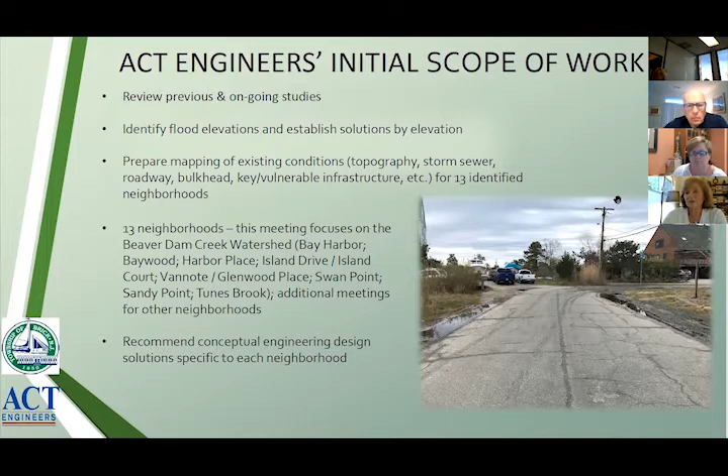So as you know, tonight's meeting we're focusing on Beaver Dam Creek Watershed. On this next slide, you will see the 13 study areas that we are focusing on, and on the right-hand side of the picture, you see the areas that are specifically identified for the study.

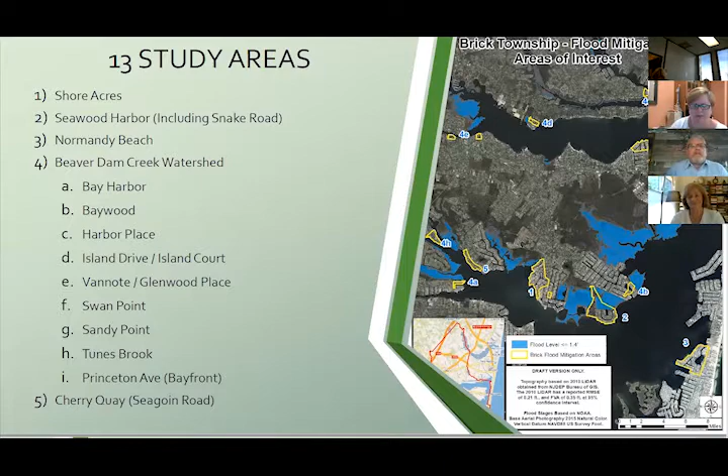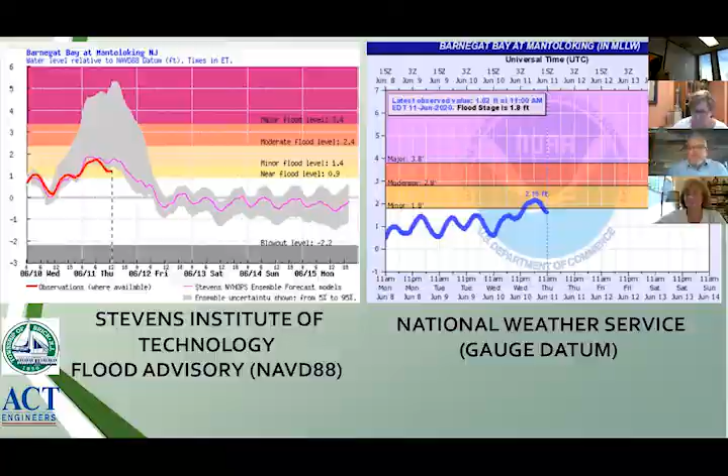So I just wanted to clarify that and mention again that all of the elevations that we're going to be talking about through the rest of the slides is going to be on the NAVD 88. Next slide.

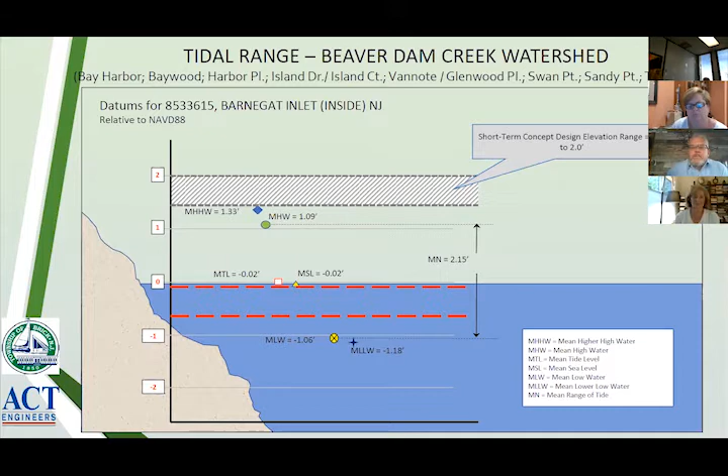Now the blue represents the fluctuations in the tide over the course of the 14 years. You can see there are several points that project above the yellow line, which I'll describe in a moment. And you can see there's an elevation and a date associated with the majority of them. The tide gauge does not record data, and they don't release data for storms such as Sandy and hurricanes because it's not reliable data, as it's beyond the range of the gauge. So those particular events are not included on here.

I just want to point out that in the center of the slide, the highest blue line, the highest tidal line, has a peak of 3.38. You'll notice most of them are well below that, and that'll come into play in a moment as to why I'm mentioning it.

Based on the yellow upper tide elevations, we came up with a concept design elevation of 1.4 to 2.0. That would be the elevation we'd look to get to with roadways, infrastructure, etc. At the 2.0 elevation, there aren't as many occurrences of flooding at these higher elevations.

You'll note there's a gap in the data between the end of 2015 and the beginning of 2017. At this point, the gauge was down and there was no data published by the agencies.

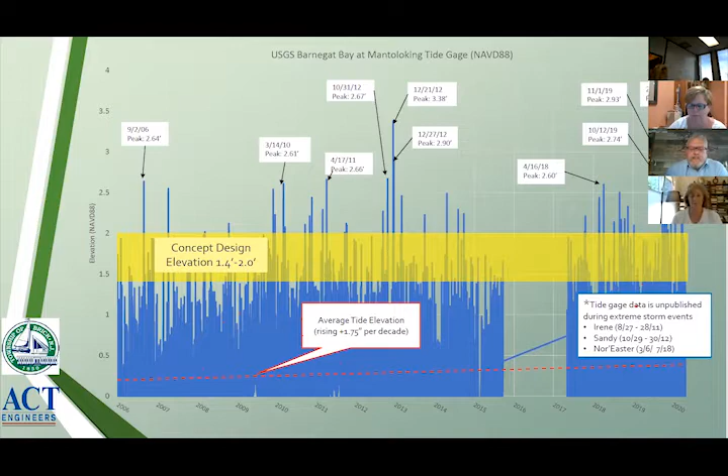This slide represents an inundation map we prepared based on the topography for the Bay Harbor area. The blue represents inundation of floodwaters, and the black is the bay waters -- it would be confusing to have that blue as well. So the blue represents water on top of marsh or land areas, to an elevation of 2.0.

If we go to the next slide, you'll notice Bay Harbor Boulevard has a portion of it in yellow. The yellow represents low-lying roadways, areas less than 2 feet, which is the flood elevation we talked about on prior slides.

This slide shows the 3.4 elevation, which from that prior slide only approached one time in the last 14 years, excluding major storm events. So this is what it would look like at 3.4, which would be more of a major flooding event.

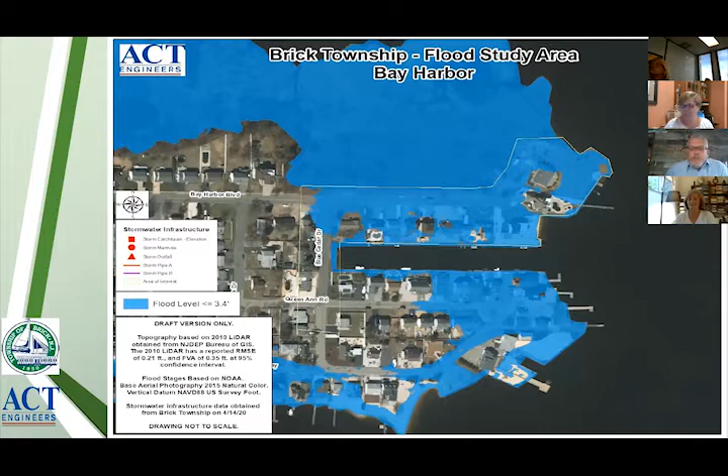Can I interrupt for a second? At our last council meeting, I don't know if you watched it, but George Scott, a resident of Queen Ann Road, got up to complain about persistent flooding down by the park -- at the end of Queen Anne. While I understand the tidal gauge doesn't reflect higher than elevation 2, if you have a south wind or an east wind, a lot of these areas just get inundated with flooding in any event because it gets trapped in the head of the bay.

Right, sure, but that's not a low-lying road. It's above elevation 2. I gave everything that was identified for the study. Can we go back? Go to the prior slide.

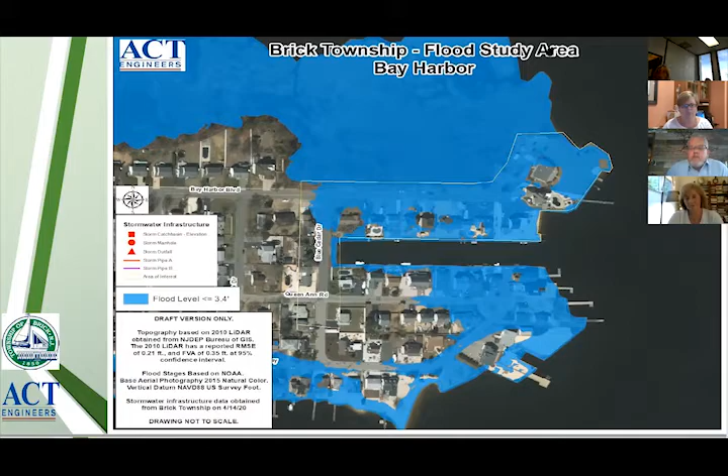If you look at the end, see how it's underwater? That should have been colored yellow as well. The end of Queen Ann Road should be yellow as well.

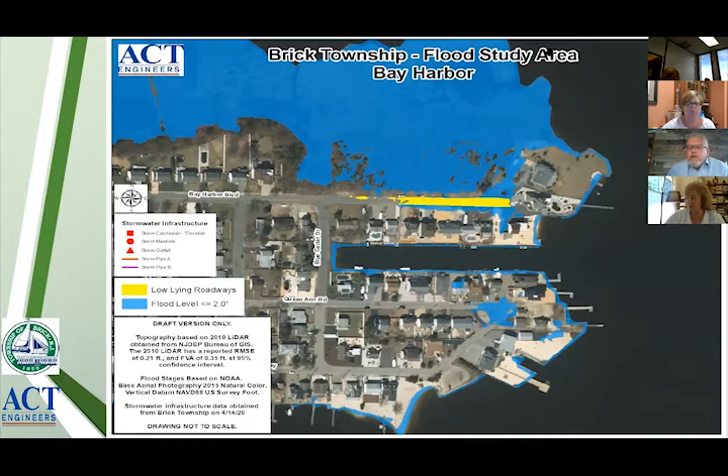Okay, go to the next one. This is the aerial, same scenario of Baywood. The orange areas on this slide indicate existing storm infrastructure, and the numbers next to the orange represent the elevation of the storm structures. At 2.0, there's flooding in a few areas, but not significant.

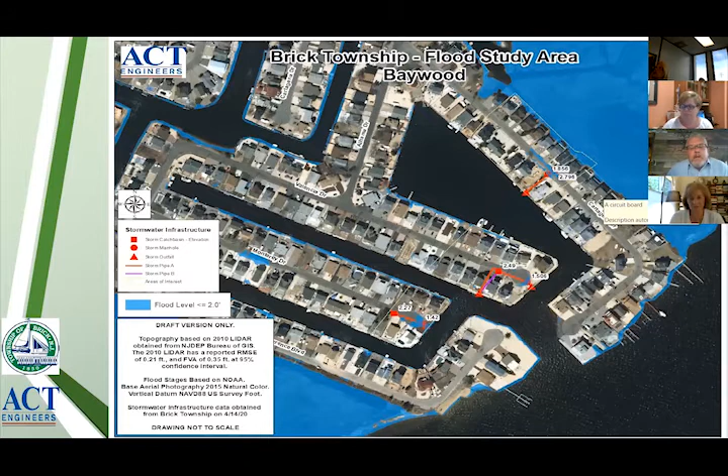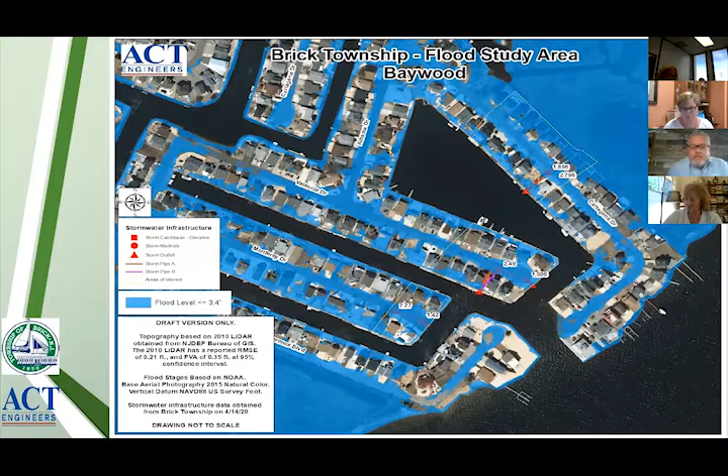Next slide will show the yellow areas that would need to be raised. These are the low-lying areas. The next slide would show the more major flooding, which would encompass more of the roadways, or almost all of them.

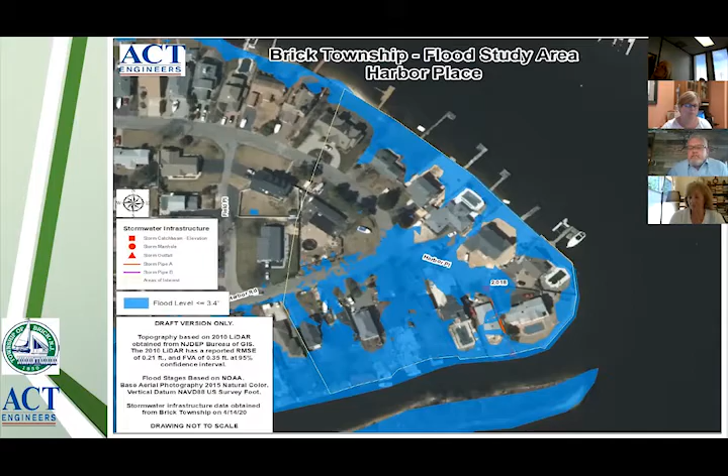And then at 3.4, all of the roadways are flooded.

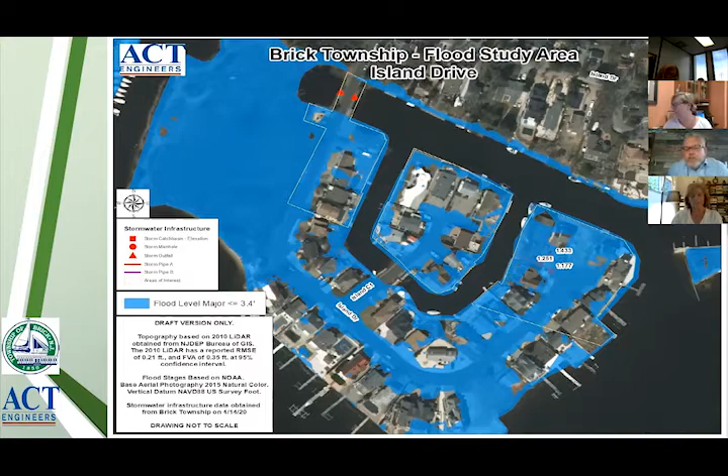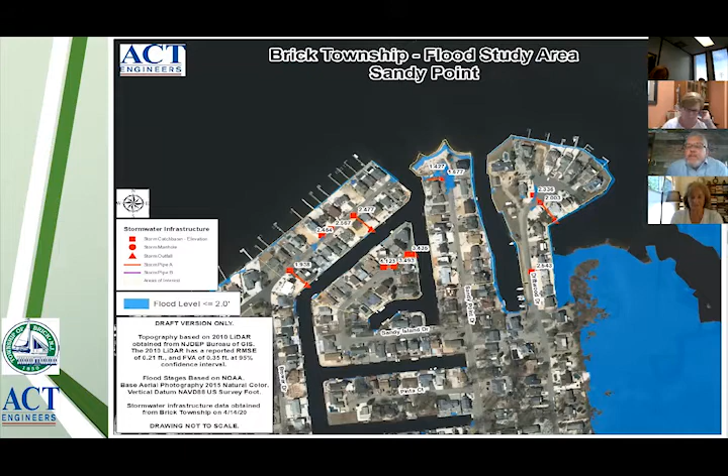Okay, next slide. This is Sandy Point. Again, you've got a little bit of flooding at the end of Sandy Point Drive. You've got some over to the left, I don't know the name of that street offhand. Go to the next slide and show you the yellow. All this flooding appears to be coming up through the inlets because it's not connected overland to any of the bulkheads.

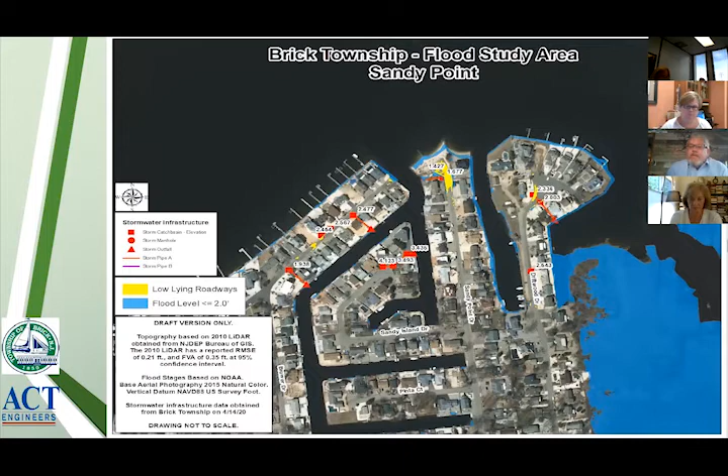The next slide. And then for an elevation of 3.4, you've got more substantial flooding of the roadways.

And this is Swan Point. There's really no drainage in Swan Point except up near the entrance road, where there's a culvert. The majority of the marsh area is flooded at an elevation of 2.

Go to the next slide, we'll show the lower part of Douglas Road and Gale Road. Is that Gale Road? Is underwater or low lying, and the end of Sheldon Avenue.

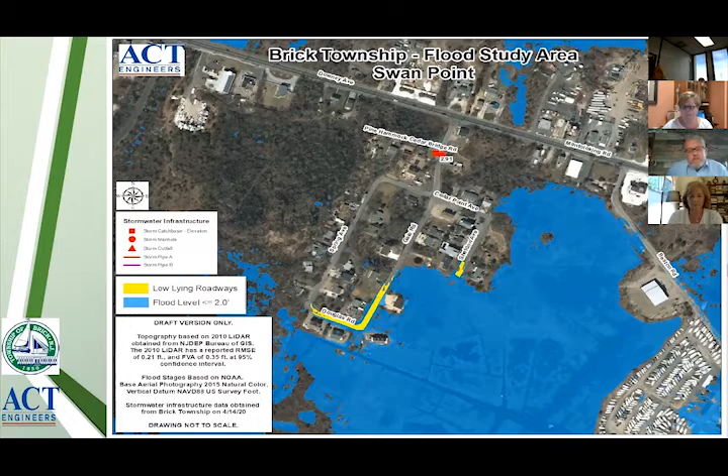And then again, the next slide will show more substantial flooding. Almost the entire neighborhood is flooded, except for a portion of Cedar Point Avenue.

This is Tunes Brook. There's quite a bit of, compared to the other neighborhoods, storm sewer in this neighborhood. There's not a lot of complete street flooding. There's a few puddles here and there around the inlets, as you can see on the edges of the road, but still wouldn't be impassable.

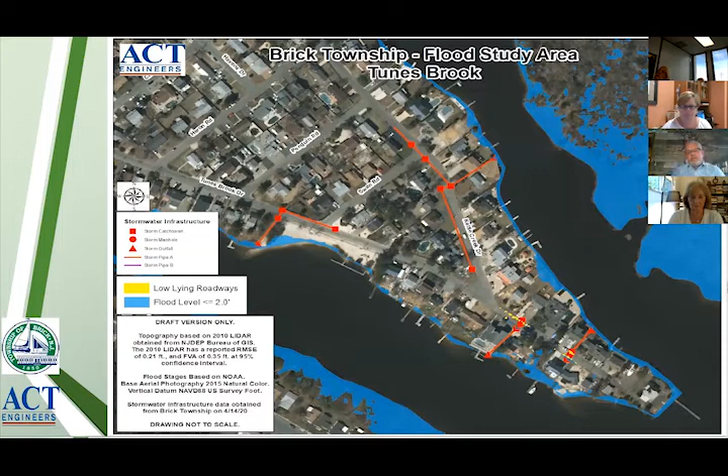Next slide. Until you get to the 3.4, which is the next slide, which then shows substantial flooding of Kettle Creek Drive and the end of Tunes Brook Drive.

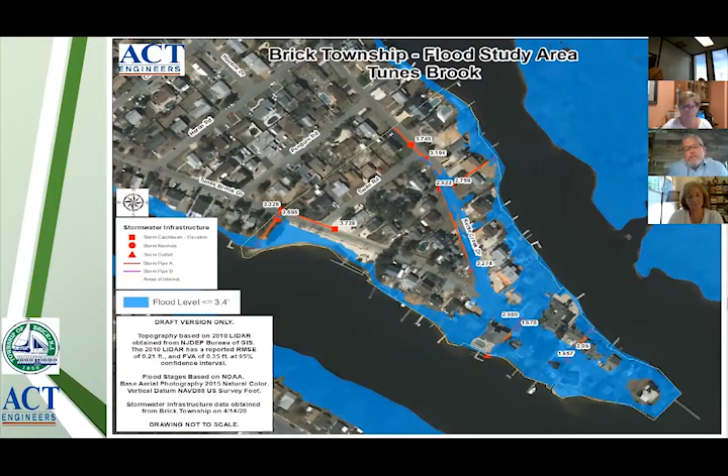That's our new flapper valve. That was our trial for the Wapro. Been successful.

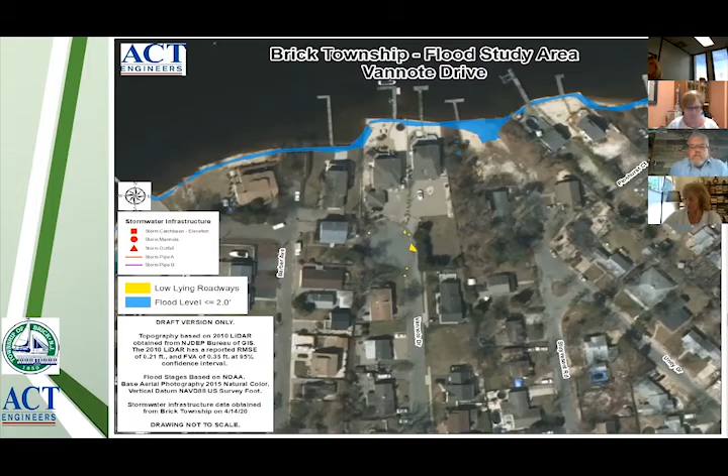So then when you have a larger storm event, you do get the entire cul-de-sac flooded. The flapper valve would definitely help prevent that.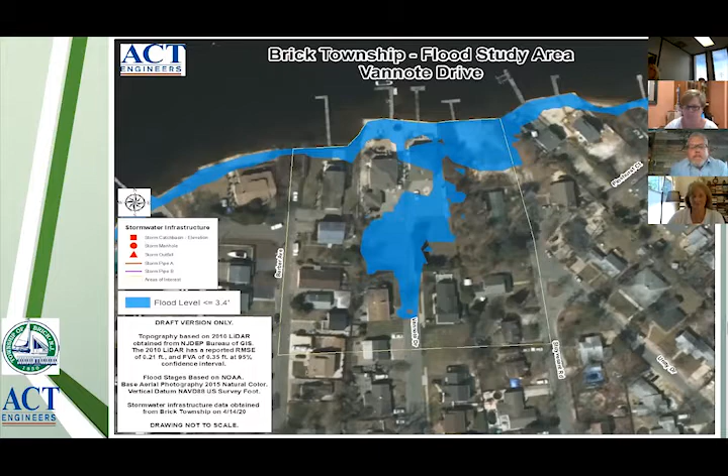So we've looked at all the inundation maps we prepared and came up with conceptual flood mitigation design approaches. On the left side are the site names, in the center are the short-term design approaches. These are designed to an elevation of less than or equal to 2 feet.

In these areas, the flood elevation reaches 2 feet or less for approximately 1,500 hours per year. To offset and mitigate that, the recommended approaches are listed for each community: a variety of installed check valves, raising of roads and driveways, and raising select bulkheads. Those are the typical recommended mitigation measures for short-term design.

The right-hand column lists long-term design approaches, for flood elevations greater than 2 feet, which occur approximately 60 hours per year. Again, the solutions for these cases are to install check valves, raise bulkheads, and in some instances install pump stations where there's significant flooding that can't be addressed because roads can't be raised high enough due to surrounding properties.

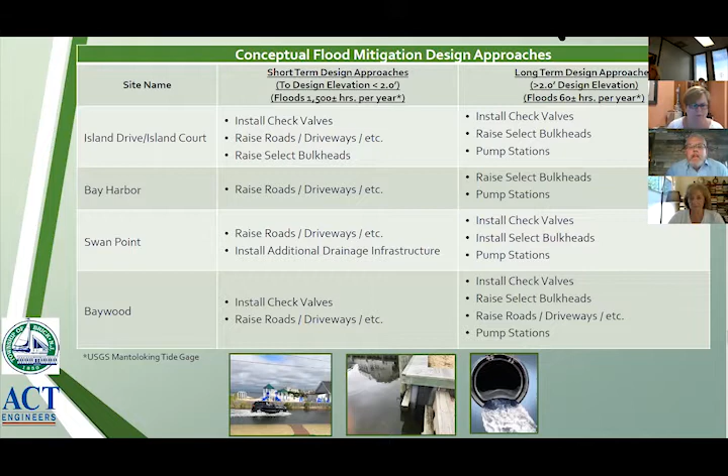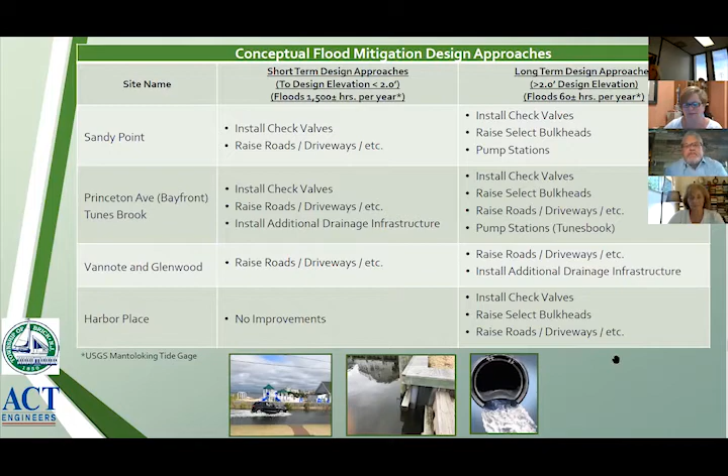It's on the cross-section slides, so it's easier to show there. Is this the second one?

Yes, so this is basically the same categories as the prior slide. Your short term in the middle and your long term on the right-hand side. The proposed mitigation measures are basically the same.

It's just a combination of different things depending upon the severity of the flooding, and also the elevation of the surrounding neighborhood properties, because you can only raise the road so high before you have to do some other type of mitigation measures. Okay, next slide.

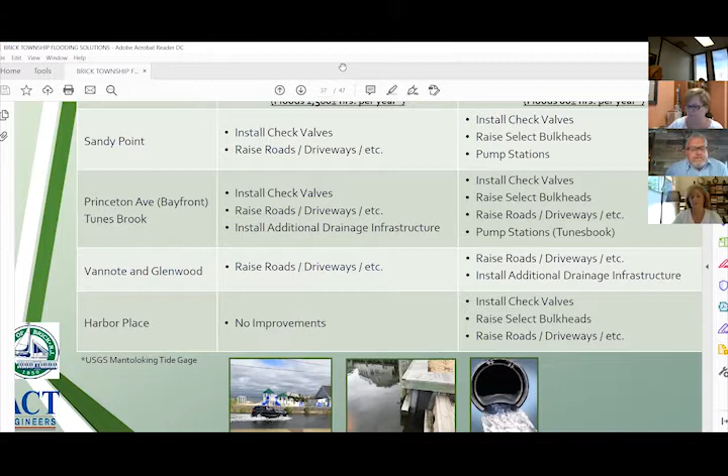There you go. So this slide shows a graphic to illustrate raising roads and how that would mitigate tidal flooding. The blue represents water, obviously.

The black line between the two homes is the existing road elevation. You can see that the blue would cross the roadway in this example, up onto the property and up over the sidewalk if there was a sidewalk and curb. That's what's represented on the right.

The white area on the right side of the road would be the vertical curb, and then the white next to it would be the sidewalk. So in the existing condition, you could have flooding across the entire roadway, covering all those areas.

By raising the roadway in orange, and conversely the curb and sidewalk, you can see that it's conceptually possible to raise the roadway so it's out of the flood, giving access to the properties, and raising a portion of the property, including readjusting the driveways to match the new road elevation, so you could get above the flood elevation.

There is still the potential for a small amount of water in the gutter, either on the curb side or non-curb side, represented by the little bit of water above the orange line in this example, which is far less than the amount that covered the entire roadway.

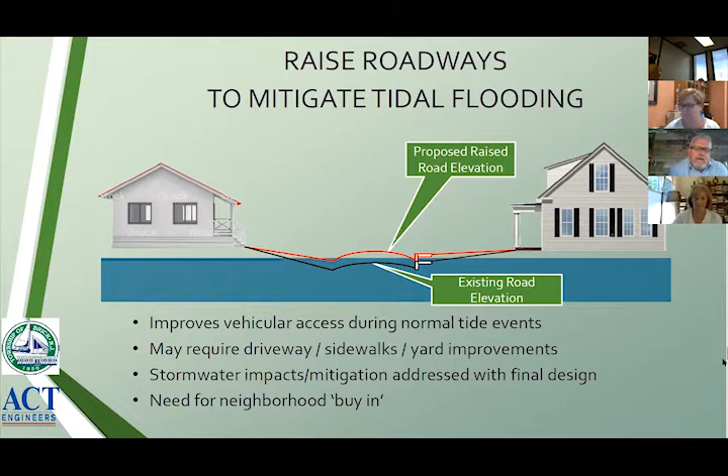This slide shows two pictures representing two potential scenarios of raising the roads. Starting with the one on the left: the red outline is the raised road, with white representing the change in elevation, and blue on the side representing potential water still in the gutter line. Instead of the entire roadway being flooded, there could potentially still be water in the gutter. This situation would occur where existing dwelling or garage elevations are so close to the existing roadway that it's not feasible to raise the edge of the road that much, so you're probably still going to have some water in the gutter. But from tidal flooding, there should be no additional water pushed onto the property for tidal events.

The one on the right shows the same thing, with the red outline being the raised road and white representing the rise in elevation. In this case, we're showing some green on the edge, which would be tying into the adjacent property. We're showing raising the edge of the road as well as the center to eliminate flooding from the properties and the roadway. Again, it's going to depend on the height of the adjacent properties.

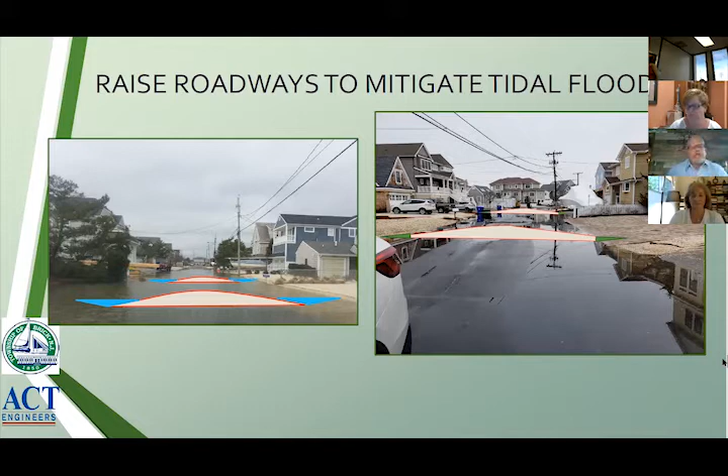This schematic shows how check valves are intended to work. The top view shows the situation with no check valve. You've got storm sewers or storm inlets on both sides of the road, labeled inlets at gutter, and you'll notice the vertical storm inlets are filled with blue water. The pipe running to the right is also full of water, going out through the head wall on the right side. So when the water comes up to the top of the head wall, or bulkhead, the water in the street achieves the same elevation, backing up into the pipe and out the inlets, reaching basically the same elevation as the bay.

The one below shows the installation of a check valve just before the bulkhead. In this situation, water can flow out from the street into the bay when the tide recedes, as there's a difference in head between the road side and the bulkhead side. For instance, if the water at the bulkhead were to drop to the top of the pipe, there would still be water in the pipe, but no higher than that. Then as the tide starts to come back in, the check valve closes and won't let any more water in, even though the bay side of the bulkhead is getting higher than the road elevation. In this graphic, white represents open air in the inlets, and blue represents the water in the inlets and the pipe.

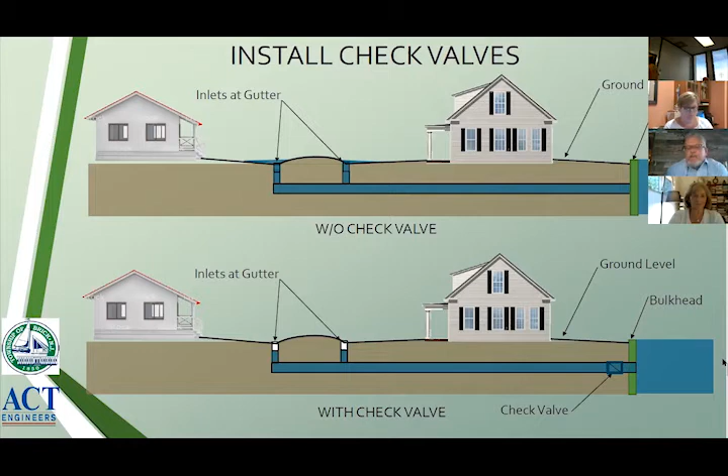So these are the type of things that would need to be repaired and looked at and mitigated so the tide waters can't circumvent the intent of the bulkhead. There's other areas along these particular communities where living shorelines or rock revetments might be a viable option. It would depend on a case-by-case basis of the data that's collected for these areas to pick the appropriate mitigation method that can be designed and permitted by the state to correct and address these situations.

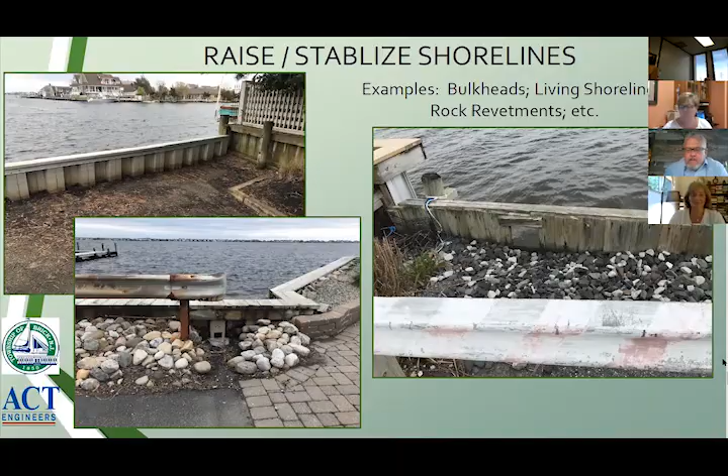Right, Jeff, you done? I think so. Okay, so let's just go quickly over the next steps.

Moving forward, we're going to be updating some additional topographic mapping in specific areas that will enable the project to move towards ultimate final design. The Township and ACT will continue to identify sources of funding. We'll be looking for the Army Corps, as well as FEMA, New Jersey Office of Emergency Management, and NJDOT, which hopefully has more funds available through their local aid program. We're going to be working with the Township to identify and recommend revisions for future design standards for the Township ordinances, and then working with BRIC in developing strategies, allocating funding, and moving to implementation, which leads to final design, obtaining the necessary permits, and then construction in the areas moving forward for the Township.

So that's our presentation, and then back to you, Joanne.

Hello. Unmute. Did I unmute? Yes, okay. You're on mute. Sorry, I was trying and it wasn't cooperating with me. So Mayor, do you have anything to add?